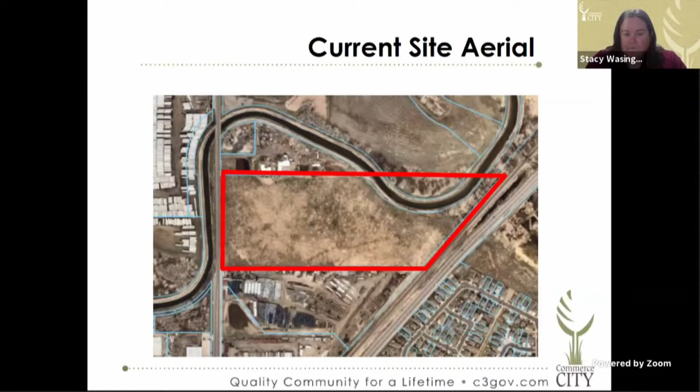So here's the proposed development plan on that site. It's not been approved yet, so this is a draft plan. We are under administrative review, and it will meet all the requirements of the land development code and the I2 zone before it would be approved to be developed this way. You can see there would be 3 consecutive lots, one for each building, and those buildings would contain warehousing and other industrial uses, or are proposed to do so.

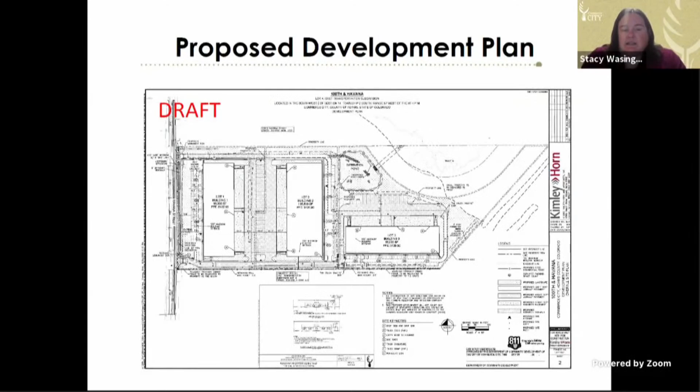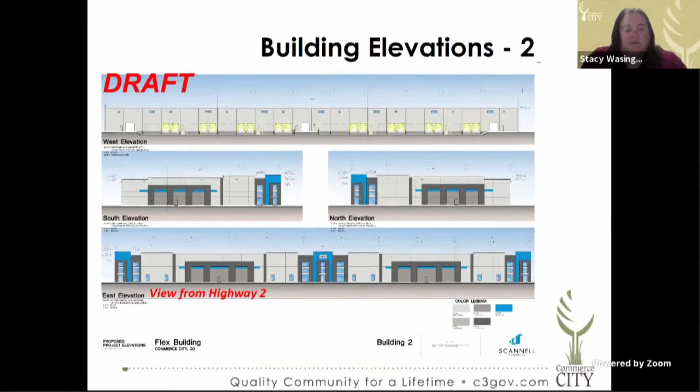So that bottom east elevation is building 2, which was the middle building, and that's the elevation that will face Highway 2.

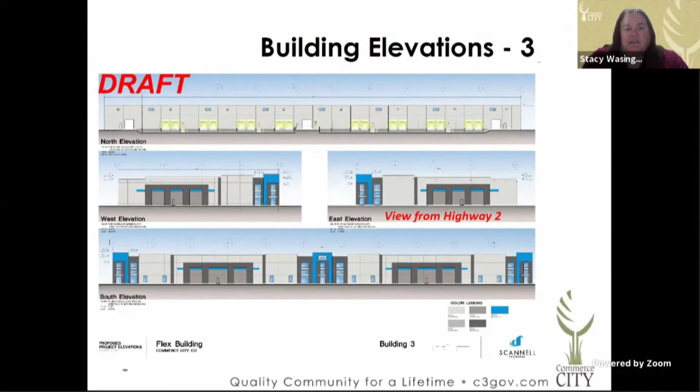And then this is the proposed building 3, and that middle right-hand elevation is the side of the building that would be the east elevation facing Highway 2.

So based on the DRT analysis, the DRT believes the rezoning is justified to remove the conditions as well as to rezone that portion to public. Similar conditions were common at the time, but current development processes and standards are more robust than they were in 1995. So with the current LDC and development plan process, some of those conditions are a little bit redundant and create more uncertainty on the developer side by having to extend that process and go through planning commission and city council rather than being an administrative review.

In those 4 conditions, as mentioned earlier, the first one deals with a buffer that's part of the lot 1 and 2 development. Lot 4 will be required to meet LDC requirements for landscaping and buffering and similar things, which are fairly robust. Conditions 2 and 3 require planning commission and city council to review and approve the initial development plan, and any changes to it, which just add additional time when we have a very robust development plan review process that can make sure all the LDC and I2 requirements are met.

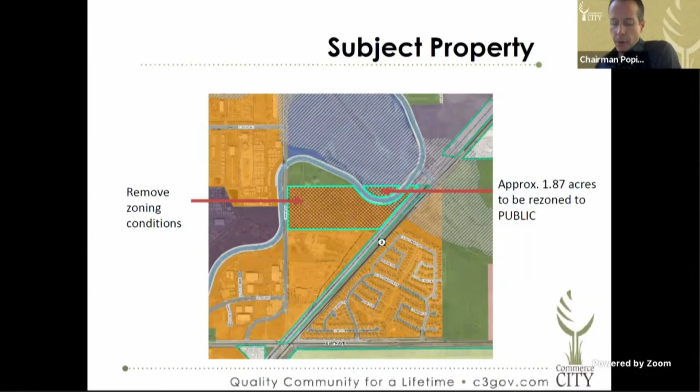Like you said, the applicant is available. It sounds like that might be Brad Cooney. Can we make him a presenter? All right, sorry about that, I got kicked off for a hot second as it was changing over.

So my name is Brad Cooney, I'm with Kimley Horn. We're the site civil engineers for this project. Noam Newman with Scannell Properties is actually the applicant for this development, and I don't want to take away from his thunder, so if we're able to switch it over to Noam.

Okay, if we need to, if you want to switch it over to him, Brad, can we make Noam the presenter or allow him to speak? I'm sorry, what was the name? Noam Newman. Looks like he has his hand raised.

Hi everyone, Noam Newman with Scannell Properties, the applicant. Thanks for everyone's time tonight. Wanted to just give a quick intro to Scannell Properties. We're a national owner and developer of industrial properties headquartered in Indianapolis, but we have a regional office here in Denver. As Stacy mentioned, we're the contract purchaser of the property that is the subject of this rezone application. We're located off the east side of Havana at what would be 100th Avenue. I'm joined tonight by my colleague Joe Marcotte, and our civil engineers from Kimley Horn, Brad Cooney and Randall Phelps. We've put together a presentation that covers some similar points that Stacy just reviewed, but with that, I'll turn it back to Brad to run through that presentation.

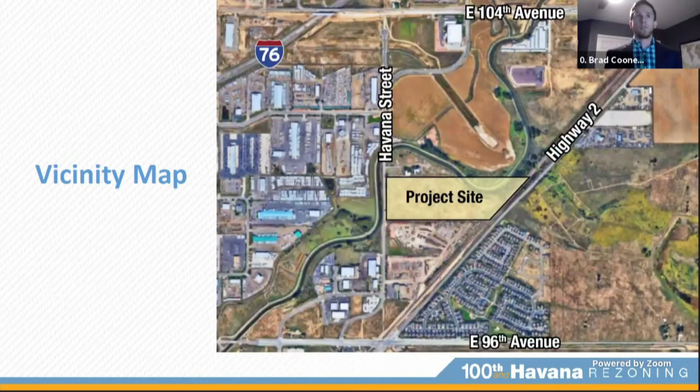What the rest of this presentation identifies is the criteria to be met as part of the rezoning: consistency with the comprehensive plan, compatibility with surrounding land uses, no impact to public services, no impact to public uses, community compatibility, and in the interest of the public. Next slide, please.

Consistency with the comprehensive plan. Future land use for the area, as Stacy mentioned, is industrial, which is consistent with the proposed use. Future land use for Tract A is shown as park. We are not proposing any development on Tract A as part of this project, and we'll be dedicating it as public space. Next slide.

Compatibility with surrounding land uses. As the vicinity map showed, the majority of developments on the south and west side are industrial. To the north is the First Creek Dog Park, which is compatible and aligns with Tract A being dedicated as public, with future land use as park. Next slide, please.

There are no negative impacts to public services, including water, sewer, storm, and streets. Industrial developments such as this are typically low water users and thus generate low sewer flows. Stormwater will be in compliance with Commerce City and Mile High Flood District standards. As part of this development, a public improvement agreement is required, including improvements to existing Havana Street. Next slide, please.

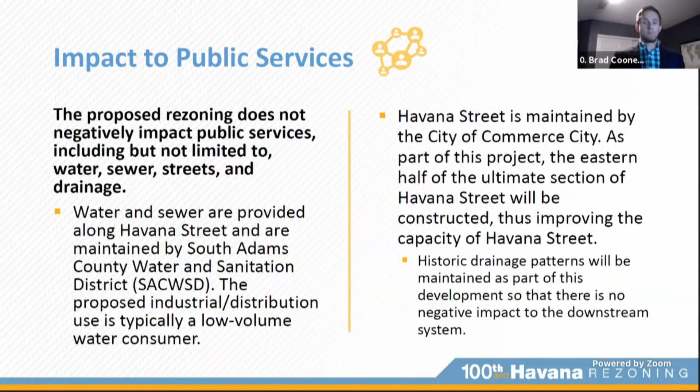No impacts to public uses. There are no negative impacts to public uses, including parks, schools, and open space. Dedicating Tract A as public zone actually enhances the existing First Creek Dog Park. Next slide, please.

Community compatibility. As previously discussed, this development is compatible with surrounding land uses and benefits the community by removing undesirable allowable uses from the Cass Transportation zoning conditions. Next slide, please.

Ultimately, this development is in the public's interest as it removes the undesirable allowable uses from the transportation zoning conditions. Rezoning to I2 without conditions also simplifies the development process and aligns with the comprehensive plan and future land use. Next slide.

This basically sums up all the points we had previously made. At this time, I'd like to open up the floor for any questions.

Brad, what was your thought process in your overall development scheme to accommodate the O'Brian Canal? The thought process was understanding that there are no impacts—we're not allowed to develop near the O'Brien Canal or up against it. Understanding that FRICO has specific requirements that we'll need to meet, we're trying to best make the site work while still keeping the O'Brien Canal active and not negatively impacting it.

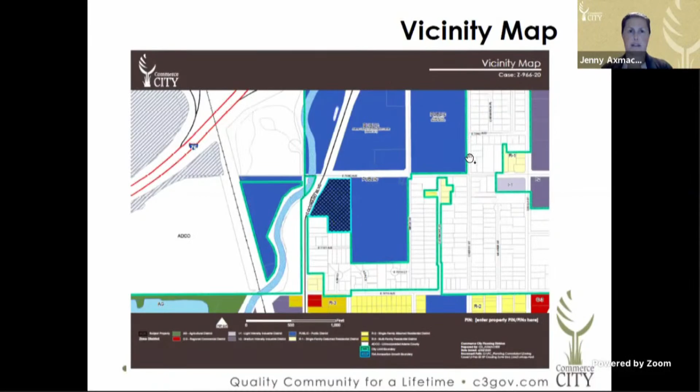To the south, we have some unincorporated residential properties in Adams County. And to the west, it's exciting to point out we have the newly opened RTD 72nd Avenue inline station, also zoned public. So the comprehensive plan for this site designates it mixed use, corridor, and commercial. There's also a station area master plan that has been done for this area adjacent to the transit center.

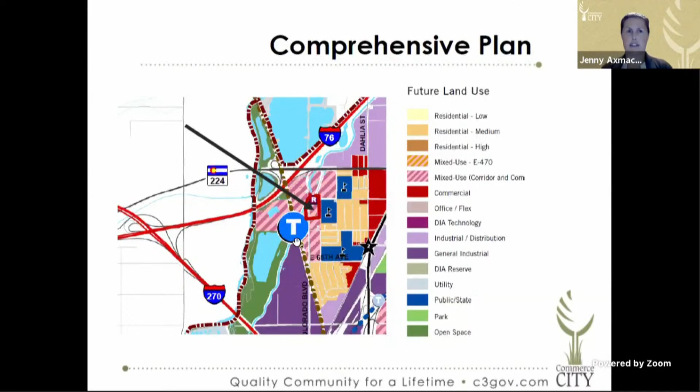The history for the site: it was rezoned to public in 1989 as the former site of the Human Services location. So the request tonight is to rezone this site from public to PUD to allow for a wider variety of uses in support of transit-oriented development.

They're proposing two planning areas within this PUD, Planning Area A and Planning Area B. Within Planning Area A is the existing office building. They're proposing some changes to the zoning that would allow more varied office and commercial uses. It includes those uses that are permissible in the C2 General Commercial Zone District, in addition to those uses that would already be allowed in the Public Zone District.

For Planning Area B, they're allowing a more dense multifamily residential use, 60 dwelling units total, based on the R3 Zone District. So the density is greater than what would be allowed in the R3 Zone District, and it also allows for accessory commercial uses. The DRT is supportive of this proposal and believes that the expansion of allowed uses and increased residential density will allow the site to more appropriately take advantage of its proximity to the 72nd Avenue station.

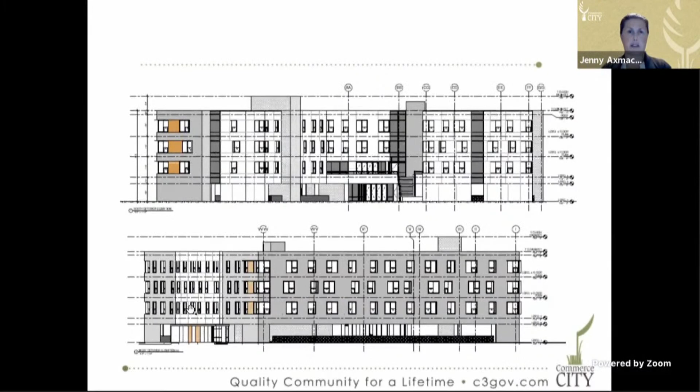For the design standards, the applicant is proposing several enhancements, including upgraded building materials and the addition of a requirement for porches and patios within the multifamily development. The DRT is also supportive of this. Here's just a rendering of the draft elevations for the proposed addition of the multifamily building on the site.

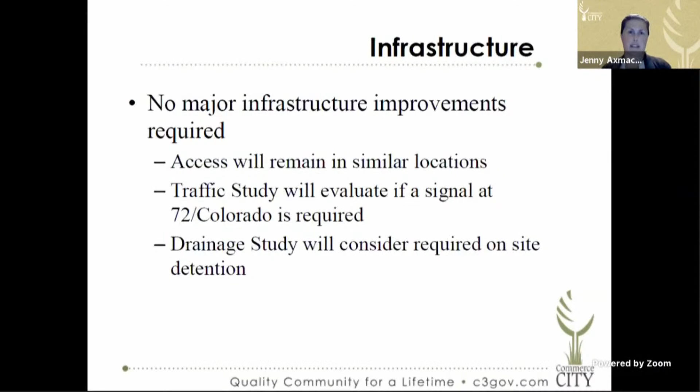So no major infrastructure improvements are anticipated. Access will remain in similar locations. The traffic study will evaluate if there's any additional requirements, considering whether a signal would be required at 72nd and Colorado Boulevard. It's important to note that the Public Works Department did just do some improvements along Colorado Boulevard in advance of that RTD station opening. And a drainage study for the project will consider whether any on-site detention will be required.

As of this date, staff has not received any inquiries from the public regarding this request. And while I neglected to include a slide, I can assure you that the notice requirements outlined in section 21-3285 were met. This property was posted, the notice was published, and the adjacent property owners were also notified.

So the DRT believes this case meets the approval criteria for rezoning to PUD, including compatibility with the future land use plan, both the comprehensive plan and the station area master plan, that it represents an improvement in quality over what could have been accomplished through strict application of the zoning code, and that it's compatible with the surrounding area. The DRT recommends that the Planning Commission vote to forward this request to Council with a favorable recommendation. With that, staff is happy to answer any questions, and then I'd be happy to introduce the applicant.

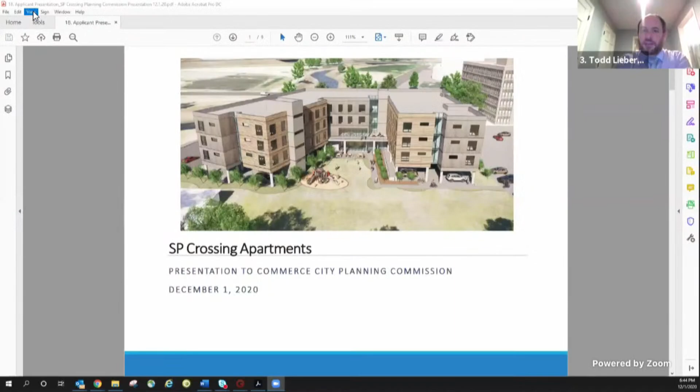Welcome, Mr. Lieberman. Hi, good evening. Nice to see you all virtually. Very excited about this project, streaming at you live right now from Kansas City. Bridgeshore Development is a national development company, and we are partnering on this development with Nesbitt Development, a local Colorado-based development company, in partnership with the Urban Land Conservancy. This development is a really exciting opportunity to build affordable housing near a transit station in Commerce City.

You can see a shot of the site, which includes a 4-story building with a podium of parking. So 4 total stories: one of the stories is parking, and on the first floor is the lobby and some amenity space, plus a really nice courtyard area with a playground. The units will be priced at all sorts of different rents, from housing affordable to people under 30% of the area median income, all the way up to 80%, which is more or less market rate. Parking is under the building, with some shared spaces adjacent, but we hope a lot of residents will use the RTD station nearby.

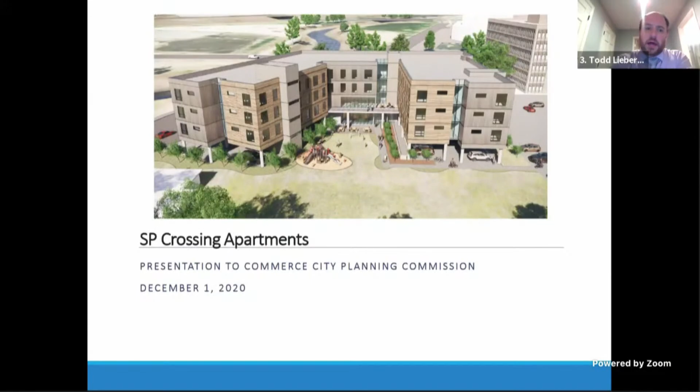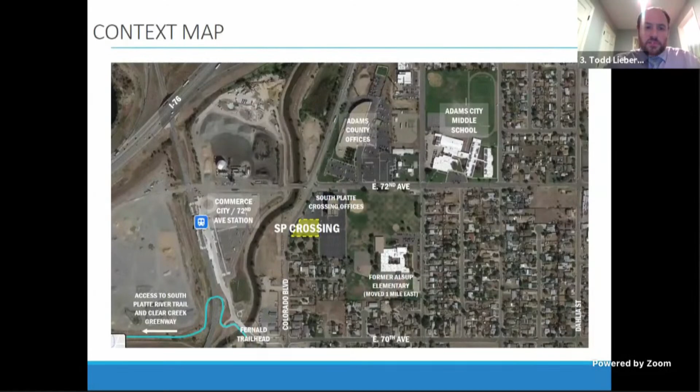We are working with a great architect locally and a great civil engineering firm on this, and are excited about moving this project forward. I probably talked too much on this slide. You can see the site, shown in yellow, across from the Commerce City 72nd Avenue station.

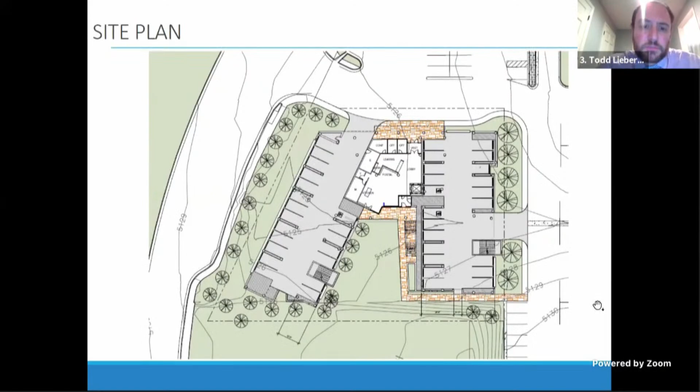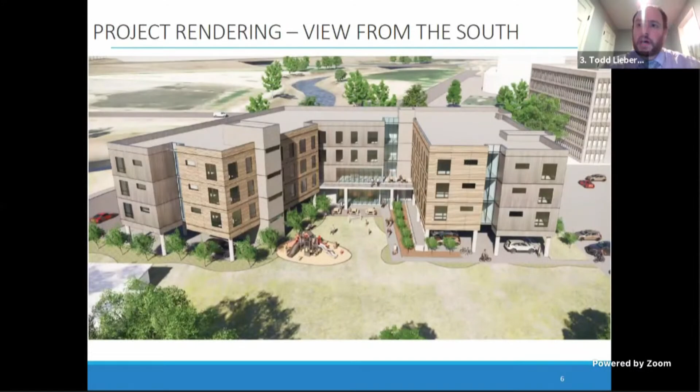Here's the shot you saw before, where you can see the amenity space opening up into the nice courtyard. Brinshore develops projects like this around the country. We currently have 2 developments in Denver, one a few blocks from the Capitol building called Capitol Square, which just broke ground, and Sheridan Station in the city of Denver. So this is our 3rd entree into the Denver region. We are joined today with our civil engineer and with the Urban Land Conservancy, who may have some additional points to add. If not, thank you for your time, and we're available to answer questions.

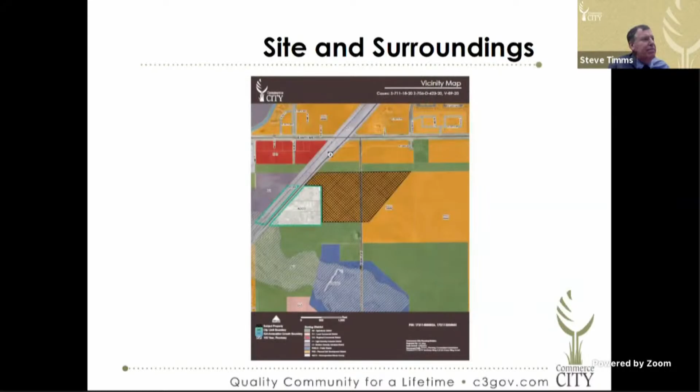The future land use plan here identifies that area of orange, which is medium density residential in our plan.

A little history on this site: this property was annexed into the city back in 1998, at which time it was zoned R1 single family. Then in 1999, Turnberry created their PUD for this development and began platting and entitling their entire development. Most of Turnberry right now, you're familiar with, is on the north side, where the Starbucks is, and Turnberry Elementary all the way up to 112th to the new rec center. That's all Turnberry, but they also own some holdings to the south, and that's what this area is. Up until now the south side has remained vacant, but now they're ready to start developing it.

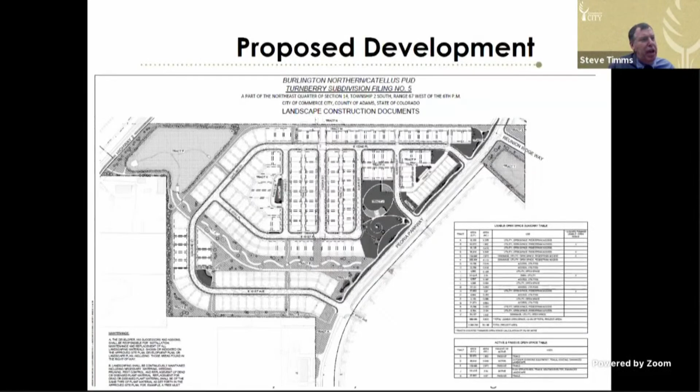This is taken from their landscape plan. The dark area in the middle is their private park, the 2.5 acre private park. This area with the white snake-like shape is the drainage tract that will run through filing 5, and up in the corner by Highway 2 it acts as a drainage pond. There are several different landscape tracts spread throughout the development.

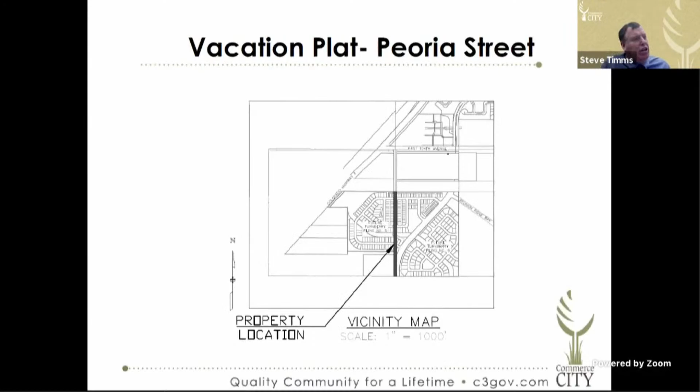This is taken from their vacation plat, showing the piece of Peoria that would be vacated, since right now it goes right through filing number 5. It would be realigned to the east and then hooked up with Revere at 104th.

The vacation and realignment of Peoria is nothing new, and not something the developer came up with recently. It's actually been identified going back 20+ years. On the left is the original PUD for Burlington Northern Catellus, basically Turnberry, showing the realigned Peoria Street. It was also identified in our latest 2010 transportation plan. On the right, the brown shows the realigned Peoria hooking up with Revere Street and Turnberry Parkway to the north.

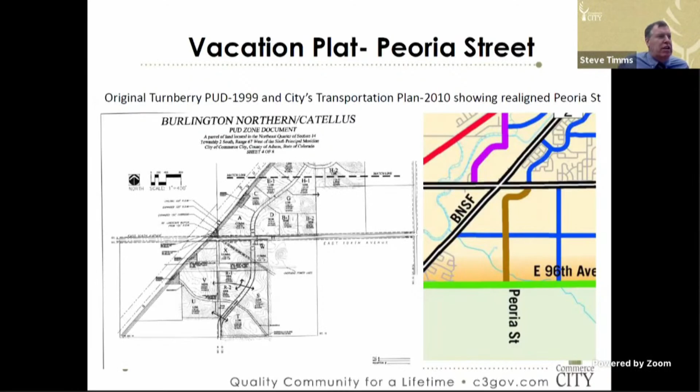If you look at where Peoria Street would hit 104th, it's basically right there at the Highway 2 intersection. We have all these diagonal intersections in our city that create traffic issues, so that's one of the main reasons to get that off that alignment. It can also provide a nice collector street throughout the entire development.

The vacation plat has to be approved first, because you can't plat over a right of way. So the vacation plat motion would have to go first before the subdivision, but the DRT is supporting it, as the comprehensive plan and transportation plan call that realignment out.

It also helps signal continued growth and construction in the Northern Range. That area between Turnberry and Reunion Ridge has remained vacant basically since the development of the city, and when commercial developers see a lot of vacant land like that, they feel the market's not mature enough. This will help fill in those holes in the Northern Range, create a strong collector road network through the development both north and south, and provide good identification and continuity for all of Turnberry. All the existing utilities in that area have been in coordination with the developer and are ongoing.

There is approval criteria in the Land Development Code, found in the exact verbiage in your packets. This is just a summary, but it has been found to be in compliance with the approval criteria found in the Land Development Code.

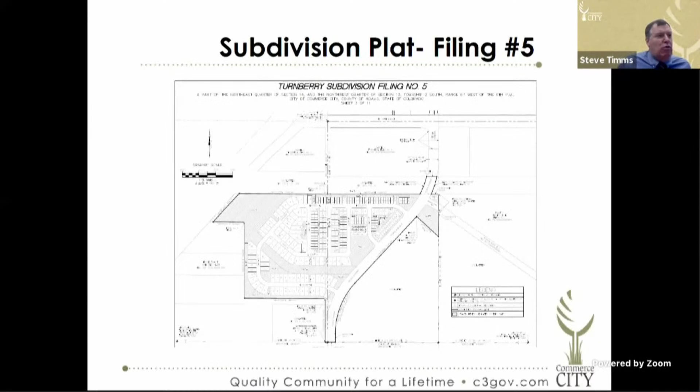This is taken from the Turnberry filing 5, which calls out the different lots and tracts, and also dedicates the right-of-way, both Peoria Parkway and the collector and local roads, to the city.

As part of the subdivision plat, it's been reviewed against the Turnberry requirements and city subdivision standards, and does meet those. It has been referred out to different agencies including the school district, utility companies, the fire district, Mile High Flood Control, Tri-County, and internal city departments, and those issues and comments have been worked through.

So the DRT is supporting this subdivision plat. It is consistent with the city requirement for the size and the layout. Again, it shows the continued growth and economic strength in the local economy, which helps to entice future retailers to the area. And it does help to implement the community vision, which was basically desiring single-family detached and attached homes in the area that have been called out specifically for that type of use going back 20+ years.

So again, with the subdivision plat, there is criteria found within your packet, the exact verbiage. This is a summary, but the DRT did find that this was in compliance with those approval criteria.

So there is one condition. Within Commerce City, within our charter and our land development code, subdivisions are approved by resolution by city council, which requires one reading. Vacations are an ordinance, they require 2 readings. So there's one condition which basically says the subdivision plat is based on the final approval of the vacation plat. If for some reason the vacation plat is not approved at second reading, then the subdivision plat becomes null and void. We don't want lots to occur over an existing right of way.

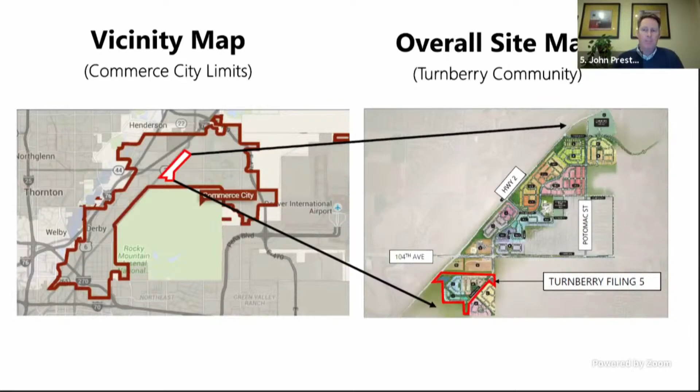So you kind of saw this a little bit, but trying to put it in context, we've got a vicinity map highlighting the entire Turnberry community within Commerce City. And then on the right-hand portion of the slide, we have an overall site map highlighting Filing 5 in red there, which is the next phase of the Turnberry community. It's located south of 104th, east of Highway 2, and west of the new Peoria alignment. Next slide, please.

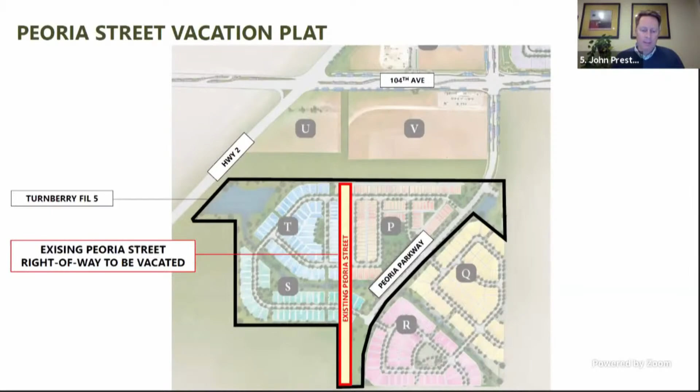As Steve went through, this filing proposes 222 homes on approximately 55 acres, which includes a mix of single family homes as well as duplex homes. The duplex homes are in that orange color, and the balance are the single family homes throughout the property. The site is accessed from two points along Peoria Parkway.

As also mentioned, it's bisected by a 100-foot wide drainage channel with a detention pond in the northwest edge by Highway 2. That drainage channel also provides additional open space with multi-use paths and looped trails, which eventually connect throughout the neighborhood. There are other open space areas, including active and passive parks, as well as the large 2.5-acre park along Peoria Parkway.

Peoria Parkway, adjacent to the site, provides connections north to 104th Avenue. It also consists of a 12-foot wide meandering regional trail for cyclists and pedestrians on the west side. We also have a perimeter landscape buffer provided along the property, specifically along the western boundary, which screens views of the adjacent properties.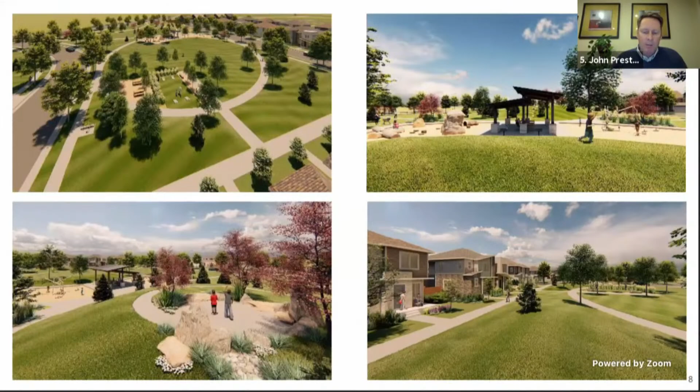If we could move to the next slide, please. This next slide has some additional images of the park area. Again, you can see the shade shelter with playgrounds on either side. You get a sense of the bermed hill feature in the bottom left. And it's interesting, even some of the duplex homes will actually front directly onto the park—a pretty unique element.

Final slide, please. So I promised to keep it brief. In conclusion, this proposal meets or exceeds all of the PUD requirements as well as the design standards in the city's land development code. It's a logical next phase for the exciting Turnberry community. With that, I want to thank you for your time this evening.